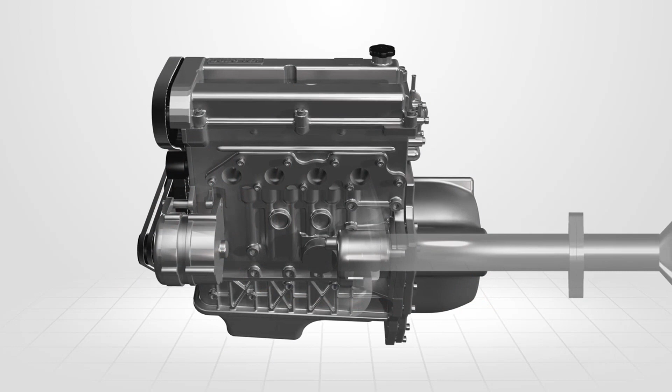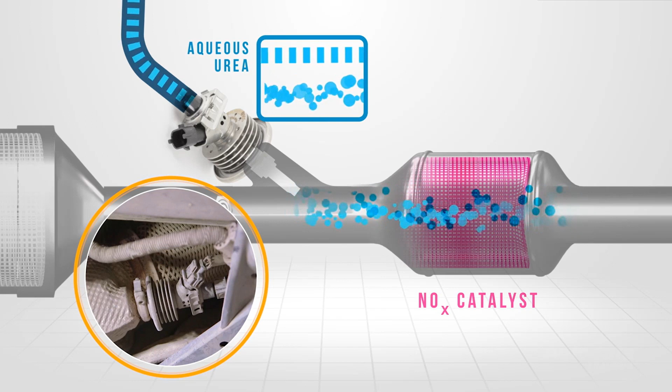Using this technology, the chemical reaction of reduction is selective, meaning that out of all the exhaust gas pollutants produced, only the NOx are specifically targeted and reduced. To achieve this, a reducing agent is injected into the exhaust gas flow upstream of the NOx catalyst. The agent more commonly used is known as aqueous urea. During the chemical reaction, the urea breaks down the NOx compound and combines with these new elements to form nitrogen and water.

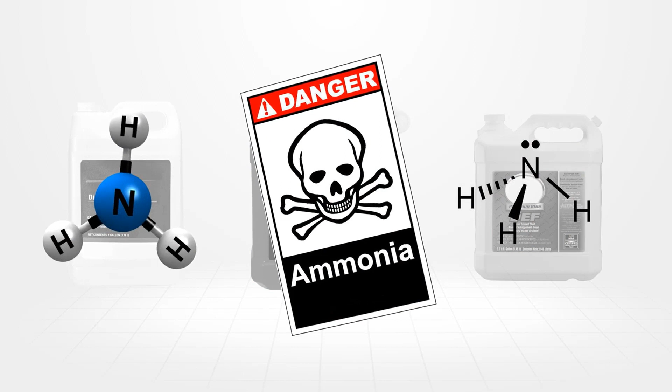Reducing agents require ammonia to break down the oxides of nitrogen. Although, due to ammonia's extremely toxic nature, the agent used in SCR systems is less pure. A common brand of aqueous urea reductant is AdBlue. This is a synthetically manufactured reductant using a 32.5% solution of urea in water.

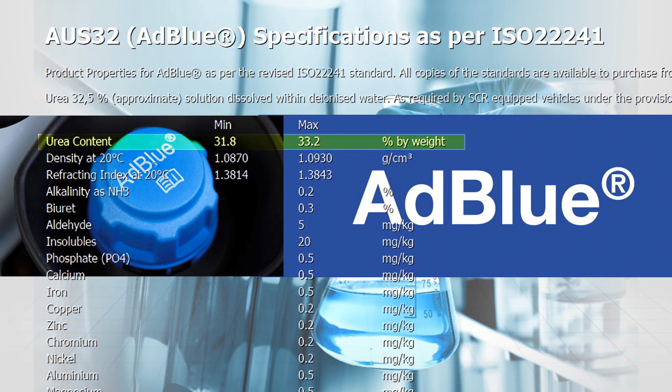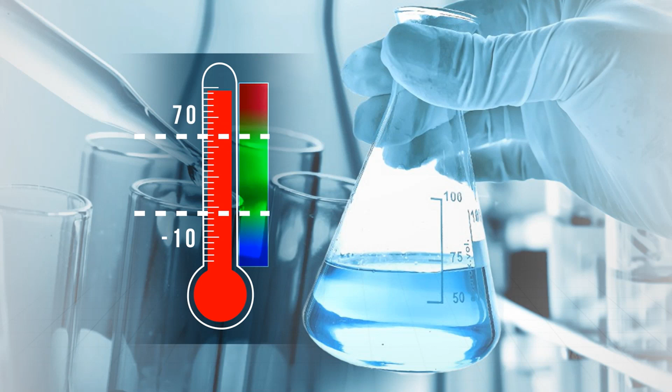Urea-based reductants must be kept within a very narrow temperature range, as most will freeze if their temperature drops below around -10 degrees Celsius. Likewise, these same reductants break down at temperatures over 70 degrees Celsius and are susceptible to bacteria growth. Vehicles using SCR must have a storage system that can encompass the characteristics of urea-based reductants.

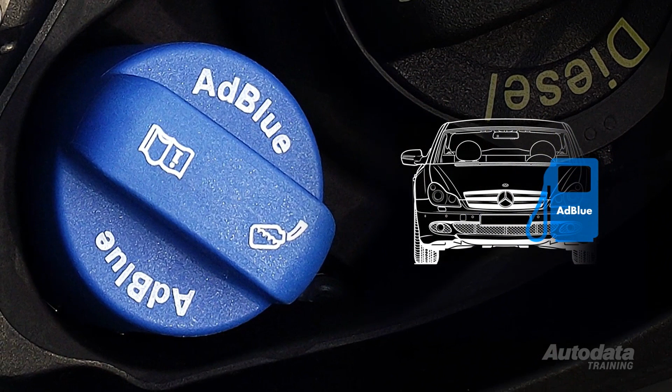To gain a better understanding of how the SCR system works, we need to be familiar with each component and their operation.

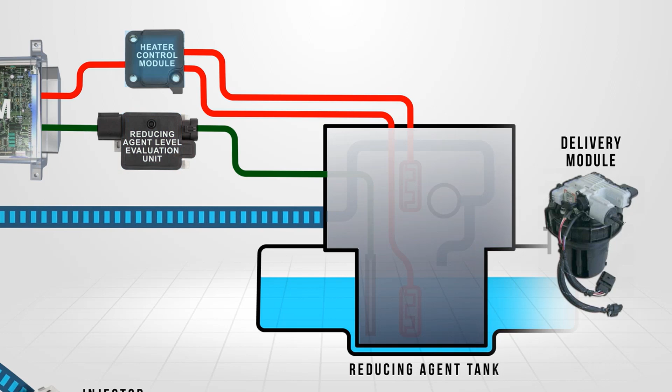The reducing agent or reductant tank contains a delivery module, level evaluation unit, and heater control module. Due to the high freezing point of the reductant, heating elements are built into the tank, delivery module, and delivery lines to prevent solidification of the urea solution.

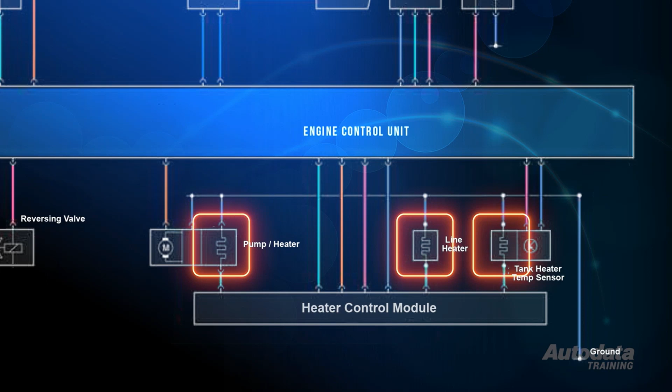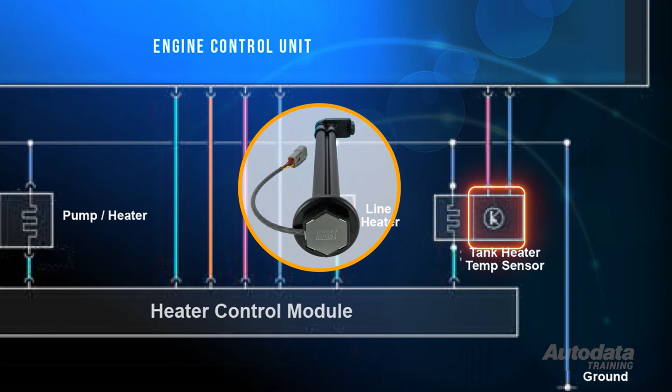Located in the reductant pump, heater pot, suction lance, and delivery line, these heating elements are operated by a dedicated control module. Information such as ambient air and engine temperature are supplied to the module by the engine control unit. The temperature of the stored reductant is supplied to the heater control module by a temperature sensor mounted to the delivery module. The reductant is drawn from a heated pot via a suction lance and filter.

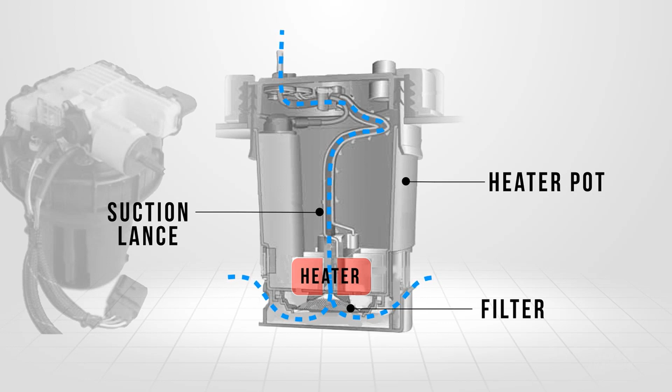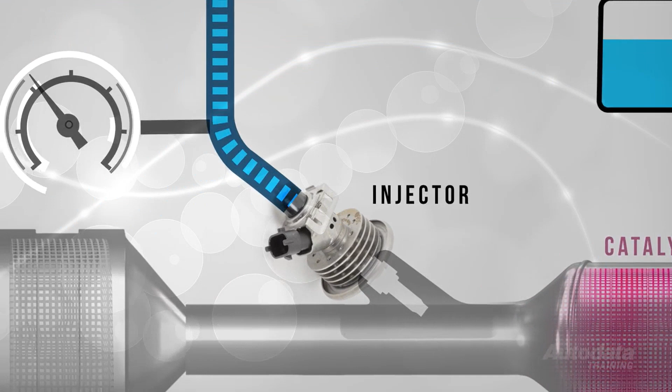The pump used in this model is a diaphragm type, driven by a brushless motor, but controlled by the vehicle's engine control module. When the ignition is switched on and the operating conditions for the SCR system are met, the pump delivers reductant to the injector at pressures in this type of system of around 5 bar, or roughly 70 psi.

When the engine is switched off, the ECM commands the pump reversing valves to operate, drawing the reductant out of the delivery line and back into the storage tank. This feature is vital for the correct operation of the system. If the reductant were to freeze in the lines or injector, not only would the NOx output of the engine exceed emission standards, but the expansion of the urea solution may cause permanent damage to the system.

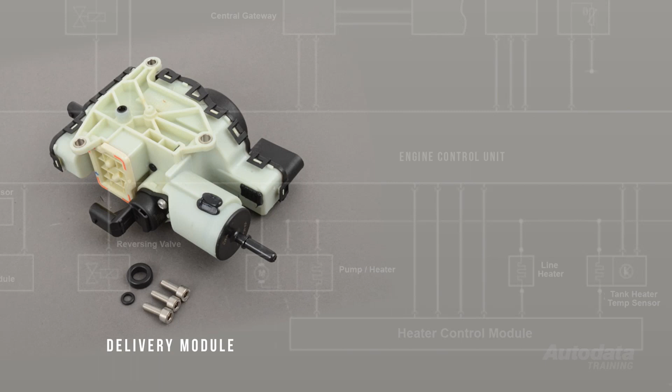The sensor used for monitoring the reductant pressure is attached to the delivery module. The ECM monitors this analog voltage signal, determining the optimal current supply to the reductant pump. The ECM will regulate this current, which is supplied to the pump in the form of a PWM control, to maintain a predefined reductant delivery rate.

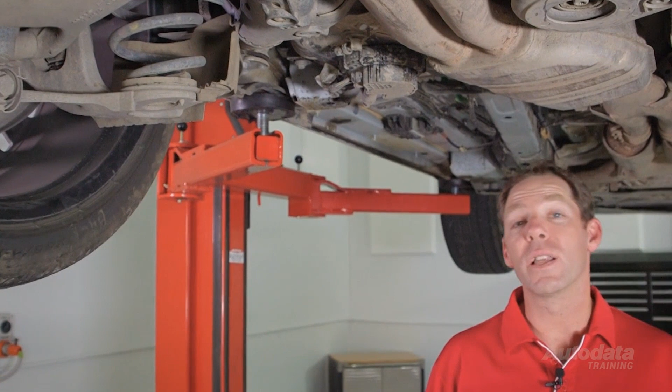The level sender unit used in the reductant tank is designed as a multi-sensor array and is mounted directly into the heater pot. A designated control module for this sender evaluates the level signals from each sensor and transmits actual level data to the engine control module via PWM signal.

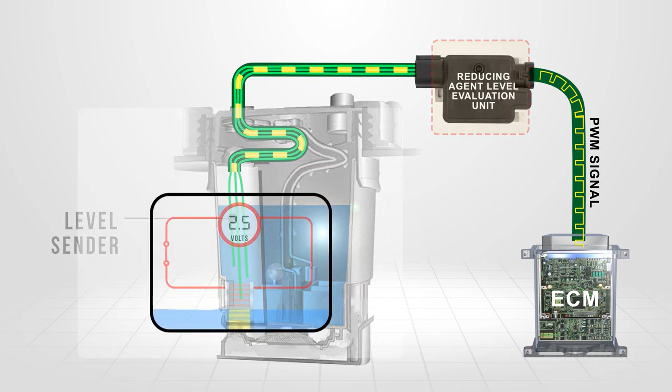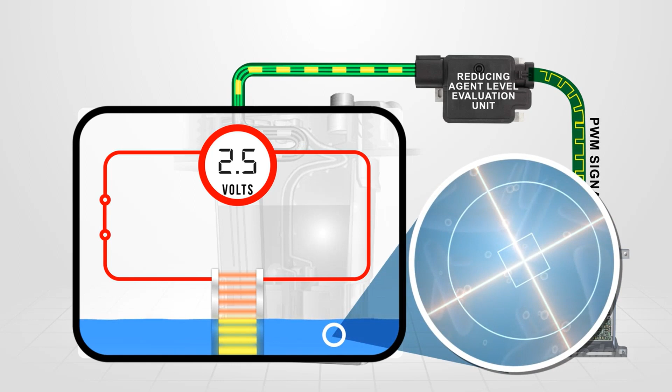The individual sensors used in the tank are of the capacitive design and are calibrated to measure different properties of the reducing agent as well as the fluid level. Because the urea solution is of a dielectric nature, contamination, biological growth, reductant breakdown, and reductant quality can be determined by the capacitance of the fluid.

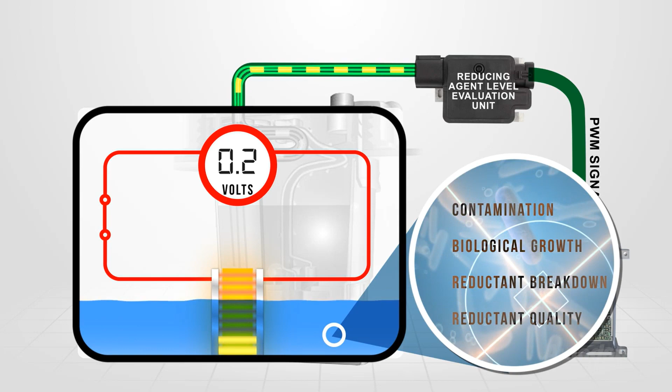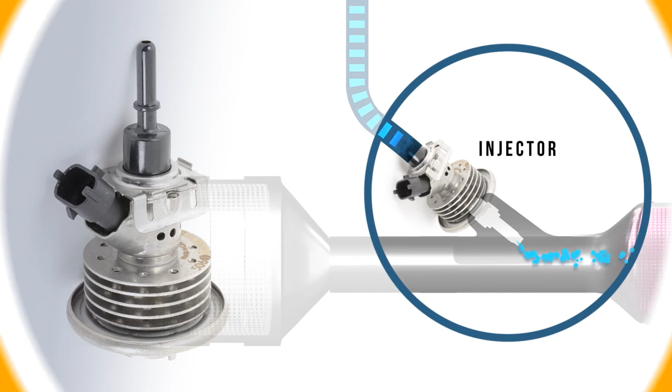Determining these variables is a legal requirement under Euro 5 emission standards. A condition of these standards is to prevent repeated engine starts if the reductant level is inadequate or the fluid quality is poor. The role of the injector is to deliver a metered quantity of reductant directly into the exhaust gases downstream of the close-coupled DPF, but before the NOx catalyst.

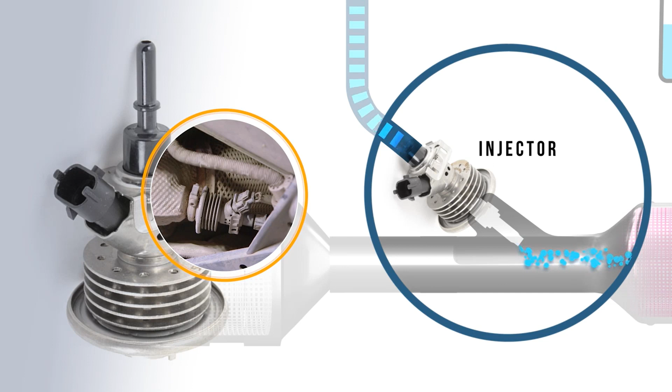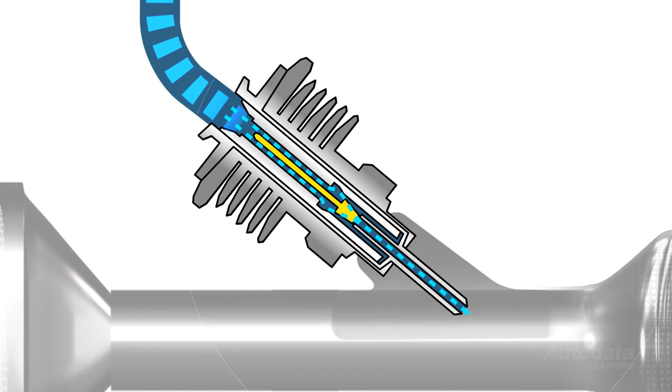Depending on the manufacturer of the SCR system, the injector pintle may be held open continuously during high engine NOx production phases, or it may be duty cycle controlled, influencing the quantity of reductant injected.

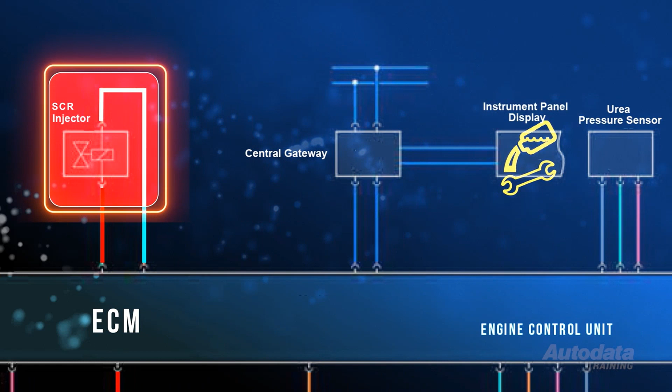The ECM is responsible for the operation and monitoring of the SCR injector and its control circuit. If a failure occurs in the injector or control circuits and reductant is unable to be introduced into the exhaust gas, the ECM may prevent engine start if the failure warnings are repeatedly ignored.

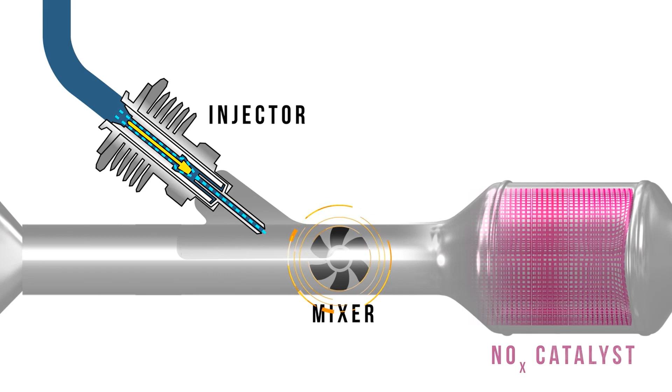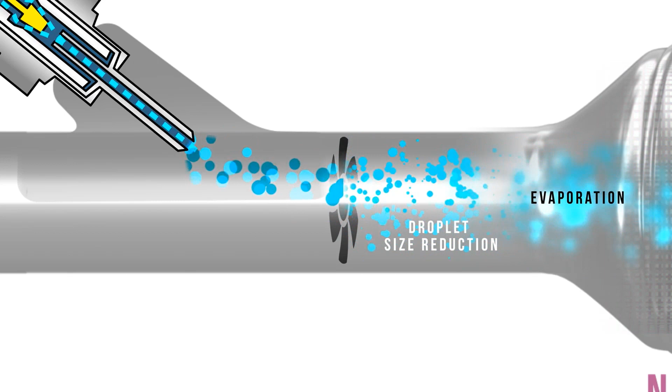A mechanical mixer is placed directly downstream from the reductant injector. The mixer functions primarily as an impact surface for the injected urea droplets. The reductant droplets are reduced in size on impact with the surface of the mixer. This allows the reducing agent to evaporate and mix into the exhaust gas faster. It also prevents larger spray droplets from impacting directly onto the NOx catalyst.

The geometry of the mixer blades causes a swirling effect to the exhaust gas flow. This promotes an even distribution of the reductant stream.

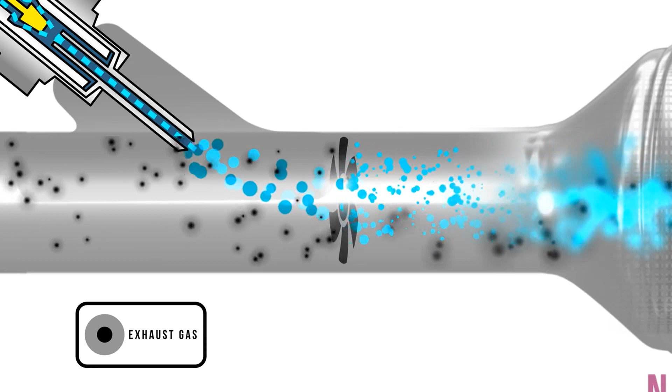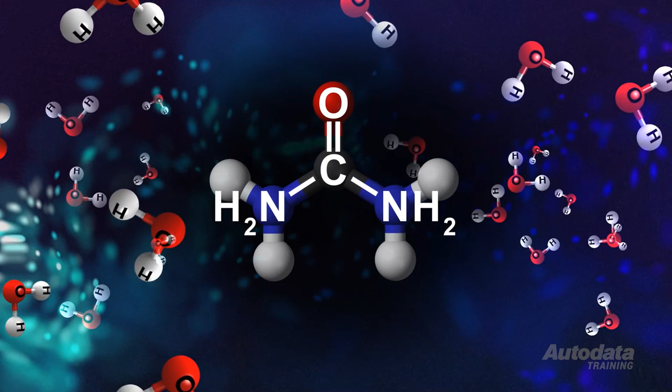Shortly after the mixing stage has occurred, the aqueous urea solution undergoes its first reaction with the exhaust gas. This stage is called thermolysis. Thermolysis is a chemical reaction in which an initial substance is broken down into several chemicals by means of heating. This reaction occurs as the water contained in the aqueous urea boils off due to the exhaust gas temperature. The remaining compound separates into ammonia and isocyanic acid.

The second stage of the first chemical reaction is known as hydrolysis. Hydrolysis is the cleavage of a chemical compound via its reaction with water. The isocyanic acid reacts with the water vapour to create additional ammonia and carbon dioxide.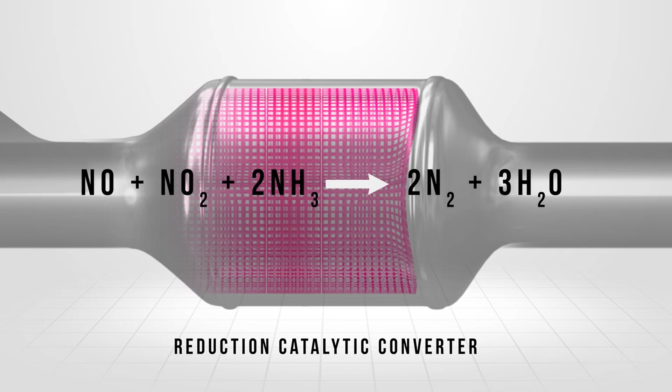NOx reduction takes place in the reduction catalytic converter. This is where the NOx give up their oxygen molecules during the reduction process. It's the reaction between the NOx and ammonia that forms nitrogen and water.

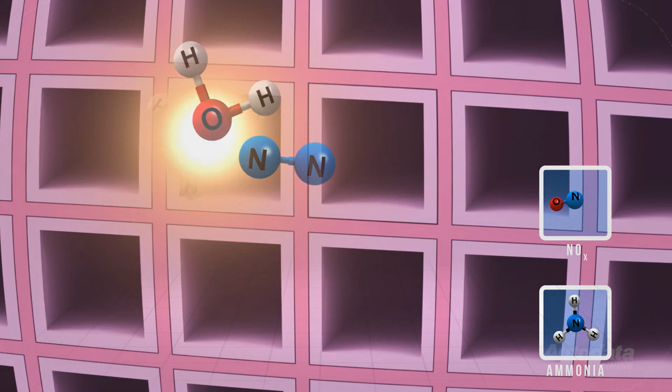The design of the reduction catalytic converter is very similar to that of an oxidation catalytic converter, using a honeycomb-shaped ceramic body. The reduction converter's substrate is coated with a copper zeolite. This coating accelerates the speed of the NOx reduction process.

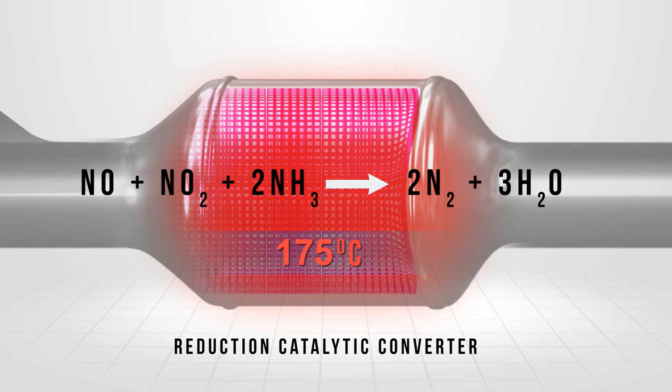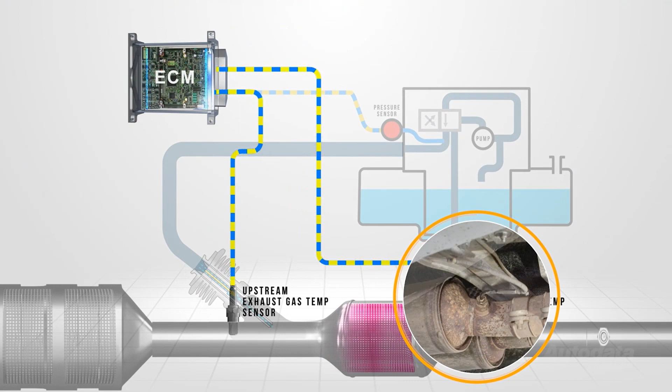The normal operating temperature of a typical reduction converter is just on 175 degrees Celsius. If the exhaust temperature drops below this, the chemical reaction is no longer effective, so reduction of the NOx can't occur. Exhaust gas temperature sensors located up and downstream of the reduction catalyst monitor and report changes in temperature to the engine control module.

The NOx sensor is mounted in the exhaust flow directly downstream of the reduction converter. This sensor is similar in operation to a wideband or lambda probe, except 2 pump cells and sensing chambers are used.

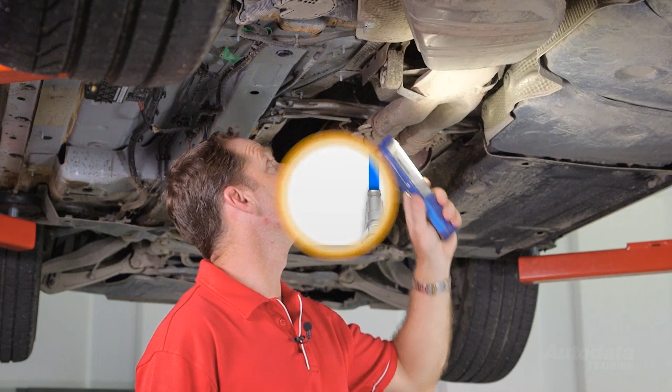The sensor is maintained at a fixed operating temperature using a ceramic heater. The monitoring of NOx gases occurs in the second chamber of the sensor. The current that flows between the 2 electrodes across the pumping chamber is proportional to the NOx present in the exhaust gas.

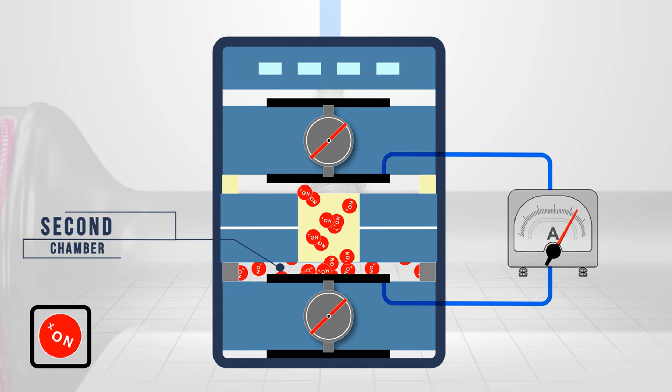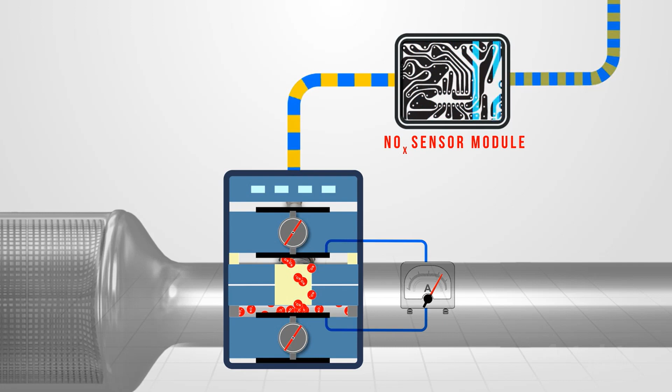Because the produced current values are very low, a NOx sensor module is located very close to the sensor itself. The module converts the current values to a network message, which is then received by the engine control module.

Reducing agents have a limited life. It may be necessary to check the condition and serviceability of the urea solution regularly with a designated service tool.

Diesel emission control is only going to get more complex as worldwide emission standards are tightened and enforced. Keep ahead of your customers' needs by learning about this rapidly evolving technology. Thanks for watching.